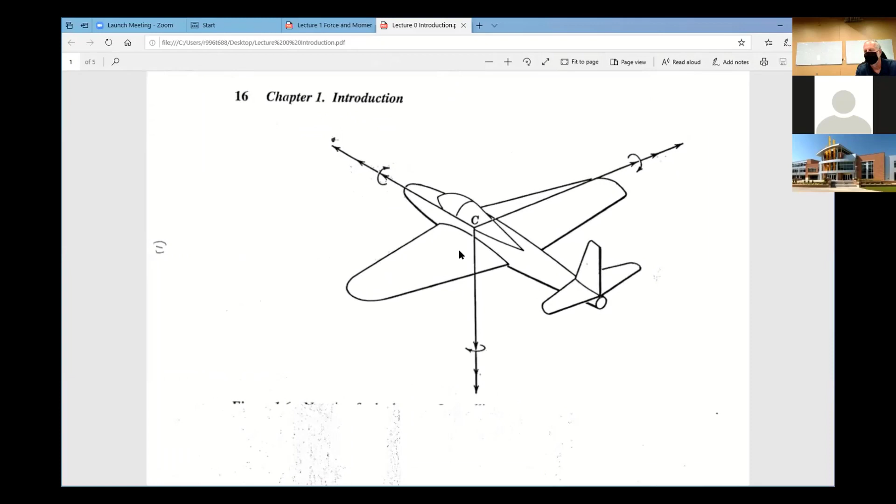So I want you on your piece of paper, on your notes, to draw this. You don't have to get the airplane looking that good, but draw that. Then on the diagram where you see the arrows, put the labels for the forces and the moments here and here. And the arrows there, label the axes first, X, Y, Z.

And then label the forward force X. I'm forgetting one thing, let me look at my notes. Yeah, so label the axes X, Y, Z all the way on the end of the axis. And then label the linear velocities U, V, and W.

I'll show you the answers here in a minute. Then label the angular velocities P, Q, and R on those circles. And then also label roll, pitch, and yawing moments on those.

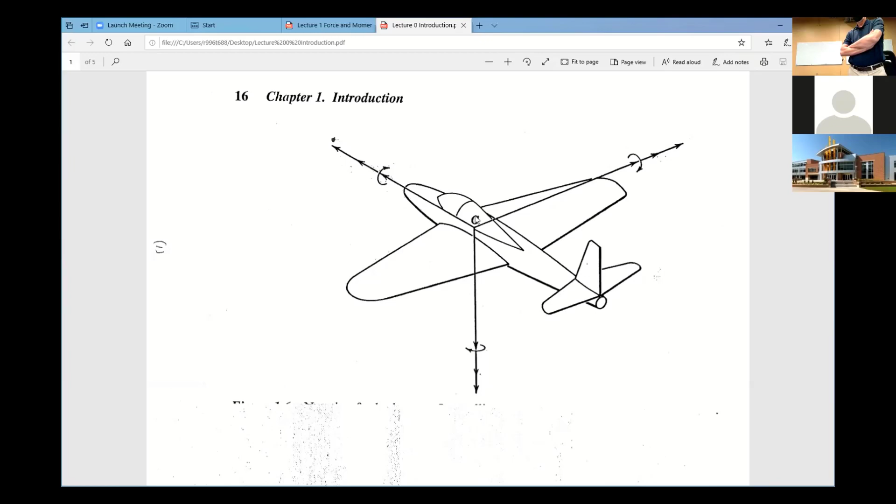All right, so here's what you should have. Now there's extra information, the X, Y, and Z are the forces, but I didn't have you put those on there. Is everybody at a place where they can see this, one of the other screens pretty well? Is it clear enough?

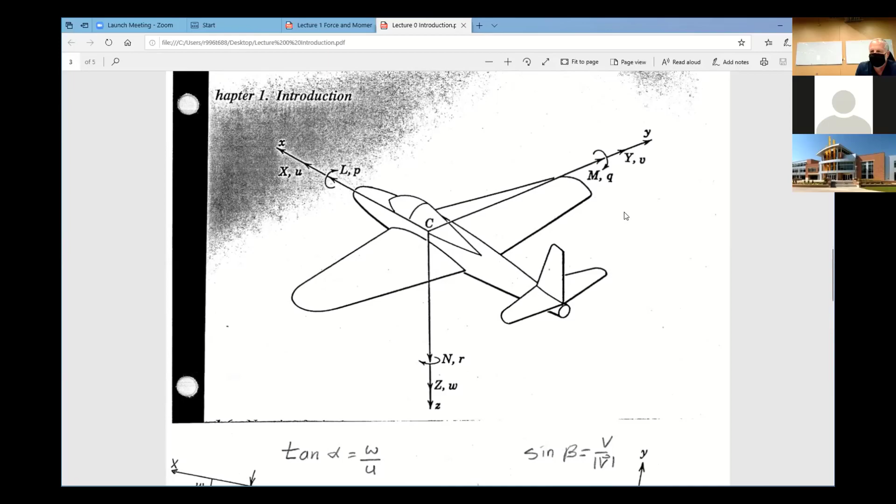All right, so this is what we've been talking about here. We have linear velocities. The velocity vector is U, I, V, J, W, K. That's forward, side, and vertical velocity. By the way, since I've already written this down, usually I write this on the board, so it takes longer. So if I get ahead, raise your hand and say slow down. Either that or we'll be done with the class halfway through the semester and we won't know what to do.

And then the angular velocity vector omega is P, I, Q, J, R, K. That's essentially what we drew on the diagram. And then the forces X, Y, and Z are sometimes called Fx, Fy, and Fz. And then we have the rolling, pitching, and yawing moments, L, M, and N.

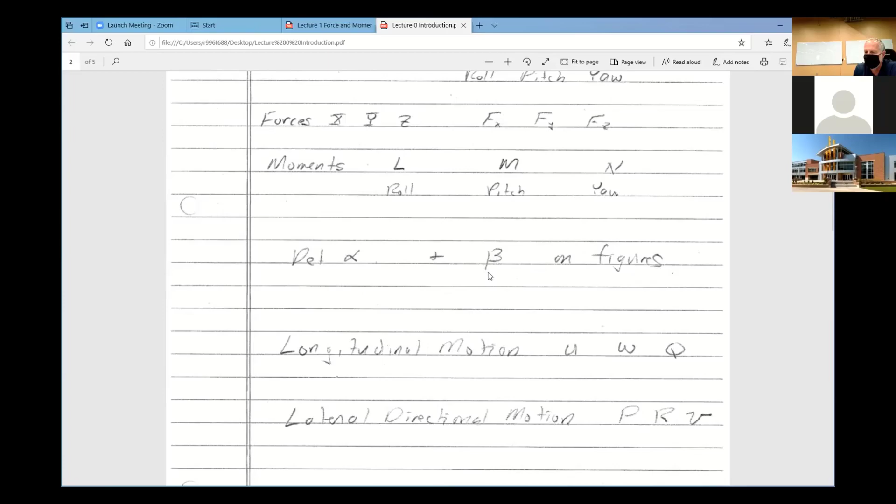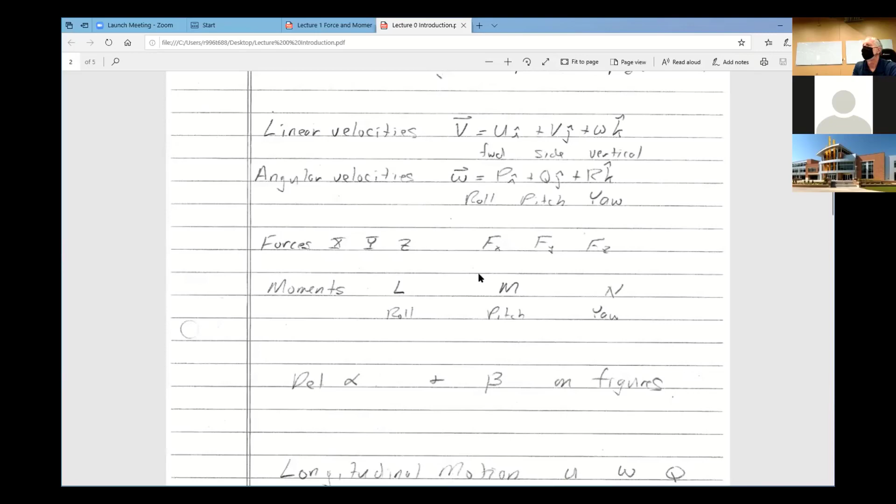And then we have the usual definitions of angle of attack and side slip angle, beta. Yeah, what do you need? I could potentially zoom in a little bigger, but I'd want to make sure that we get a significant part on the screen.

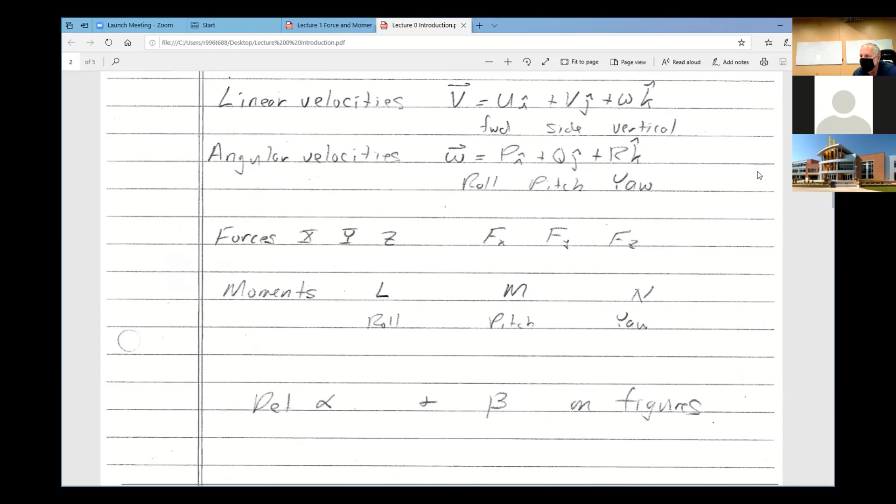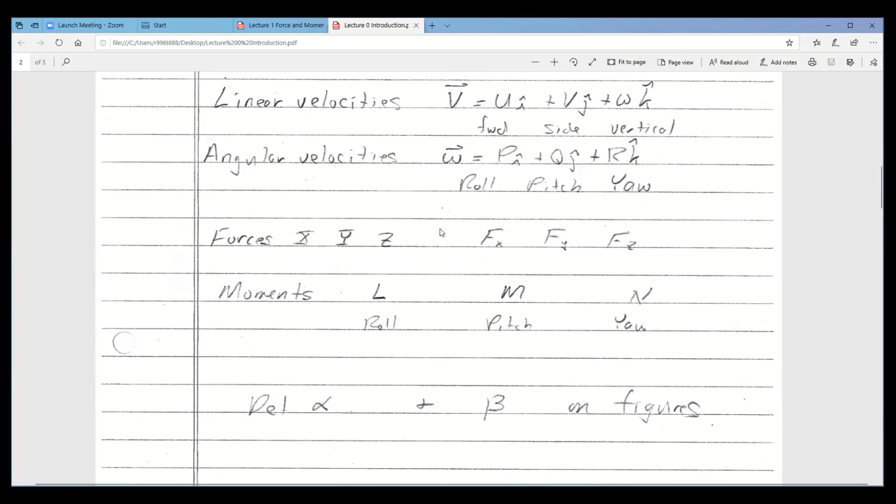We don't need... are we good? So we're going to define alpha and beta, and that's on the next page. So if you look at the top, start with the right figure here. That's where we need to start. There's the full velocity vector.

Forward with some side velocity v. And then you see the other two components, the x and the z component, both in this plane here. Hang on a second, let me see if I can make my cursor bigger. All right, let's see how we're doing now. I think that's easier to see.

So we've got the velocity vector here, the side velocity v, so this angle is beta. And so the sine of beta is little v over the magnitude of the full vector V, right?

And then if you look at the side of the airplane, you can see the two components that were hidden in that vertical plane, the u, forward velocity, and the downward velocity w. And so alpha is the tangent of those two.

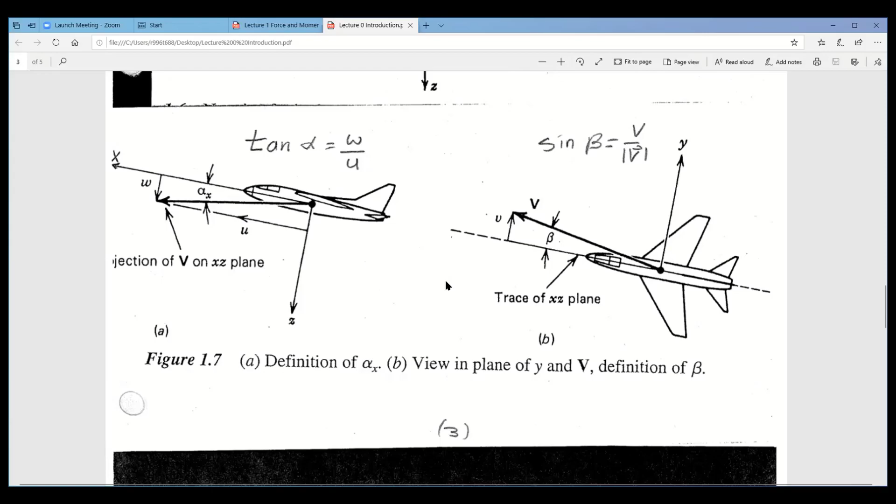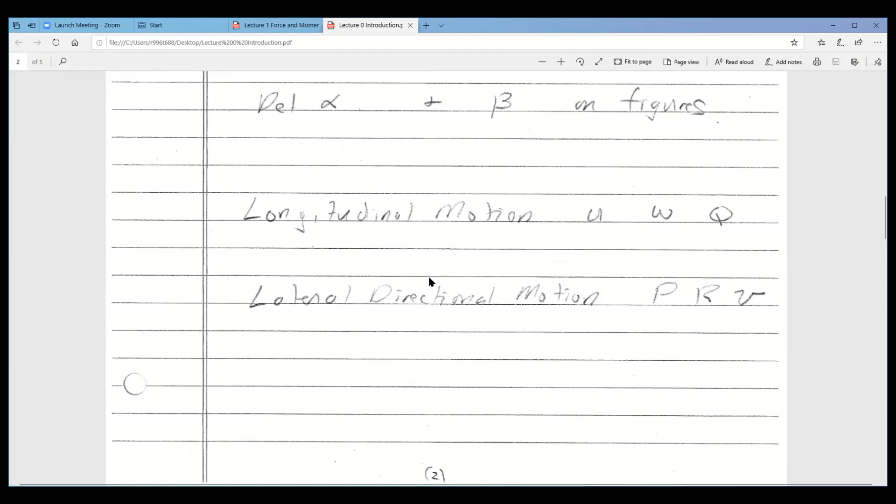All right, the last thing that we'll use, and that is really washed out. Can you see that? It's what we call longitudinal motion and lateral directional motion. Longitudinal is U and W and Q. And lateral directional motion is P, R, and V. So really this is motion in the vertical plane and pitch. And then lateral directional is anything outside that vertical plane. So roll, yaw, pushes the nose outside of the plane, or the wings outside the plane motion. And then side velocity is out of the plane because you're moving the airplane across the plane.

And you've seen this before in your undergrad classes, just a reminder, because we can separate out the analysis into longitudinal and lateral directional, and it makes things a lot easier.

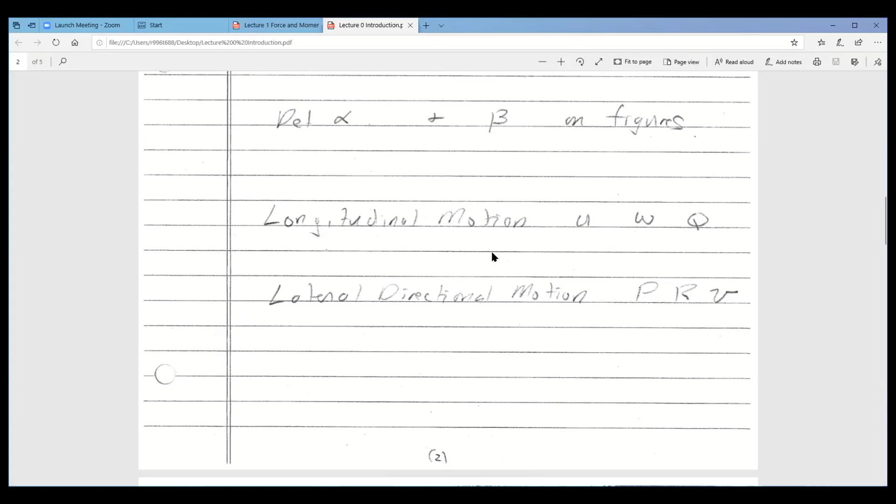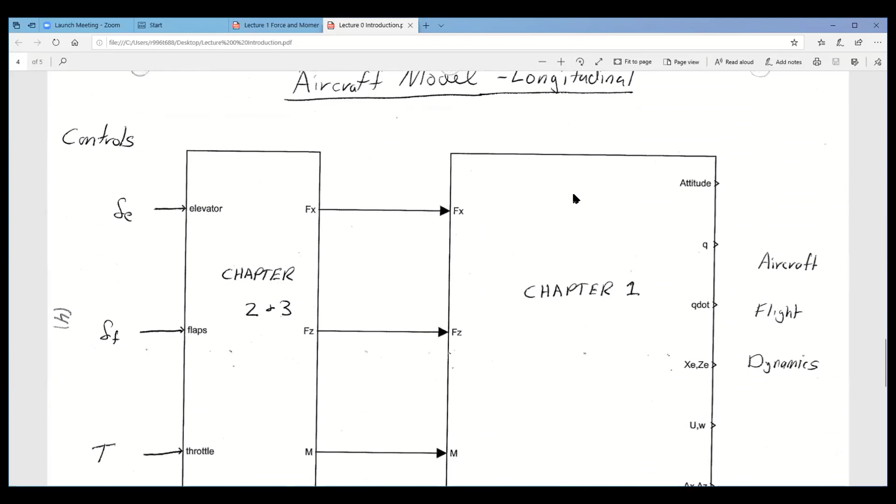All right, so we've done all this. This is a diagram that kind of outlines the first half of the class. Chapter 1 is going to be the equations of motion, where you put in the forces and moments, and then you calculate the motion. Attitude, pitch rate, this is longitudinal, the velocities here, and accelerations. So chapter 1, we'll be talking about essentially Newton's laws for the airplane. So we'll spend 2 weeks, 2.5 weeks on that.

And then chapters 2 and 3 are talking about how do you calculate the forces and the moments. Because the elevator produces a force, it also produces a moment. Flaps, throttle, produce forces and moments. So essentially we're going to calculate lift and drag and pitching moment and then put them in the proper axes.

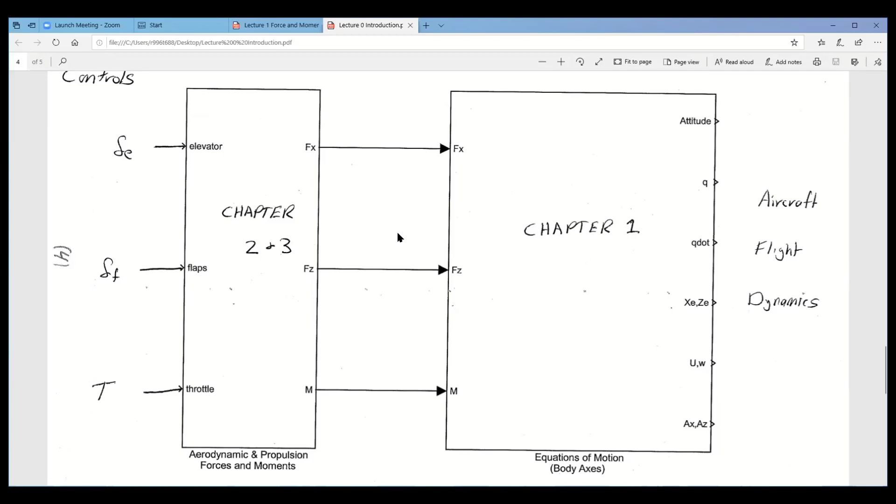And then we'll also talk about the full equations of motion occasionally, where you have elevator, flap, thrust, aileron, rudder, spoilers, and you get the 3 forces, the 3 moments, and it goes into the full-blown equations of motion that are not separated out into longitudinal and lateral directional, and you calculate the motion of the aircraft. You don't need to copy this down. It's just information about, well, I'll show you some block diagrams as we go along in MATLAB that do this kind of thing.

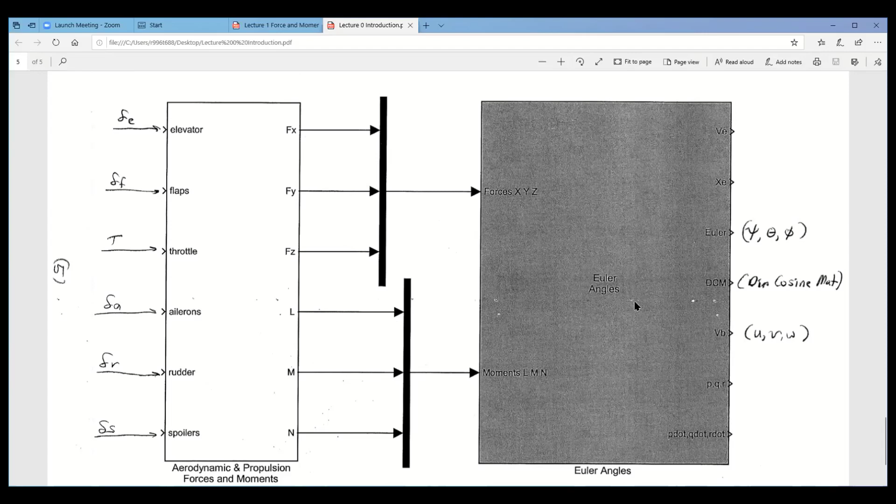All right, questions so far? This is kind of an introduction and a reminder of stuff we knew in 514.

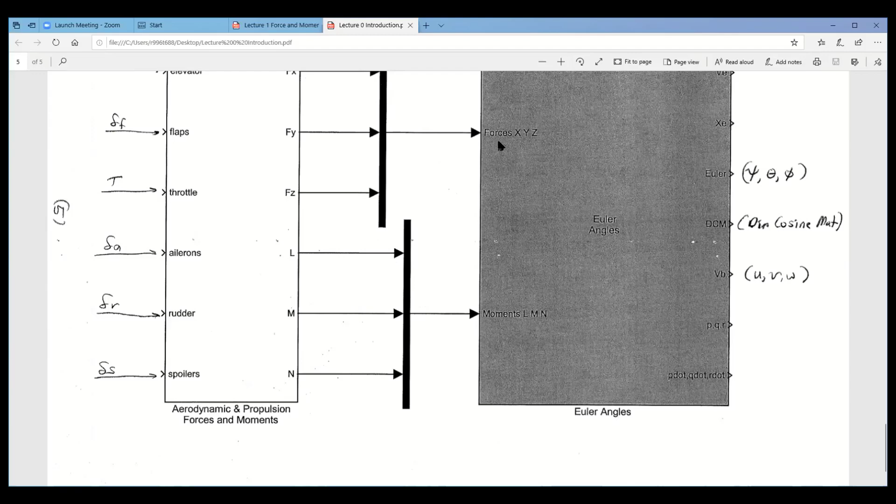And I'd say that chapter 1 and the lecture we're going to do next time is probably the most tedious that we'll do here. In your dynamics class, you looked at the equations of motion for a distributed body, right? Newton's law is for a point mass. But if we have a disk, then we need to apply Newton's law to all of the little tiny point masses on that disk.

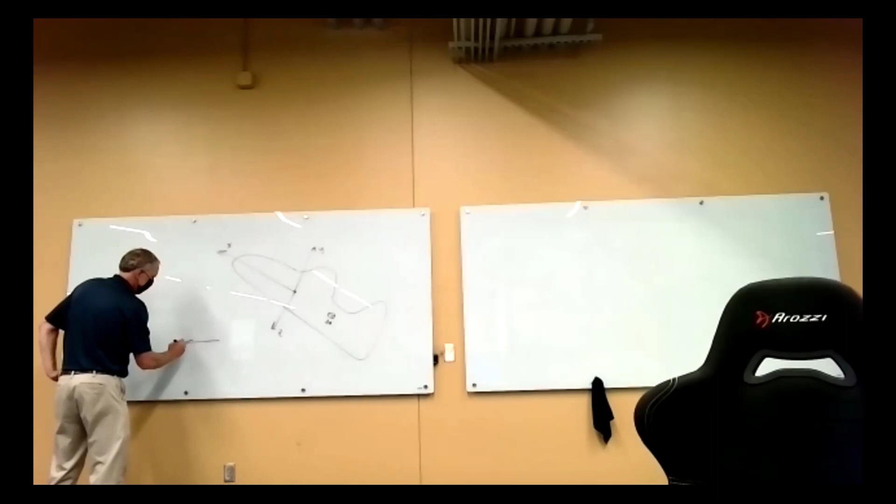On any kind of a rigid body, we can attach a body fixed axis system like that. But it's not a point mass. And so we have to look at the forces and moments on each little point mass dm. And we have to do that relative to another axis system that's inertial, because this body can be rotating.

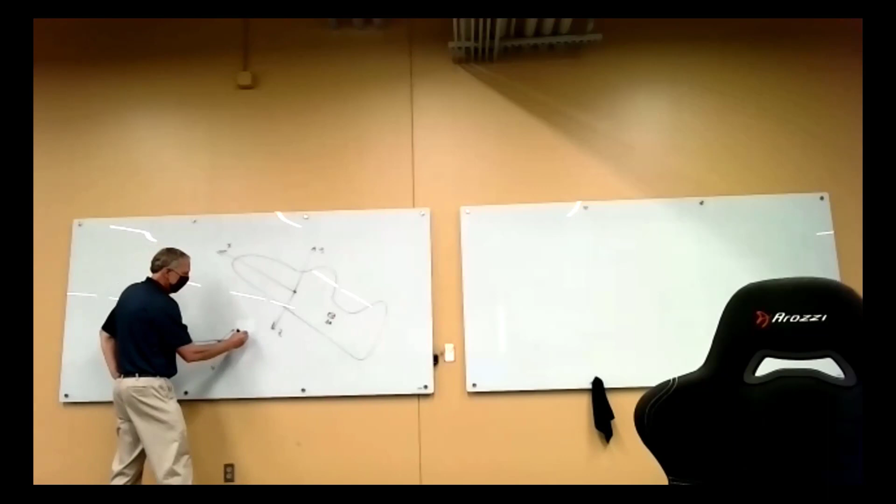And so the diagram that I'll pull up here in a minute, but I wanted to walk through it before we looked at the whole thing, is that we have to look at how each little point mass via a position vector moves in this axis system, the inertial reference frame. And so essentially we end up integrating all of these little masses and Newton's law applied to each of those masses over the whole airplane.

The picture I'm going to show you is my sketch. It's not the greatest, so there's a version of that in your book you can look up as well. It's much better because they took a lot of time drawing it.

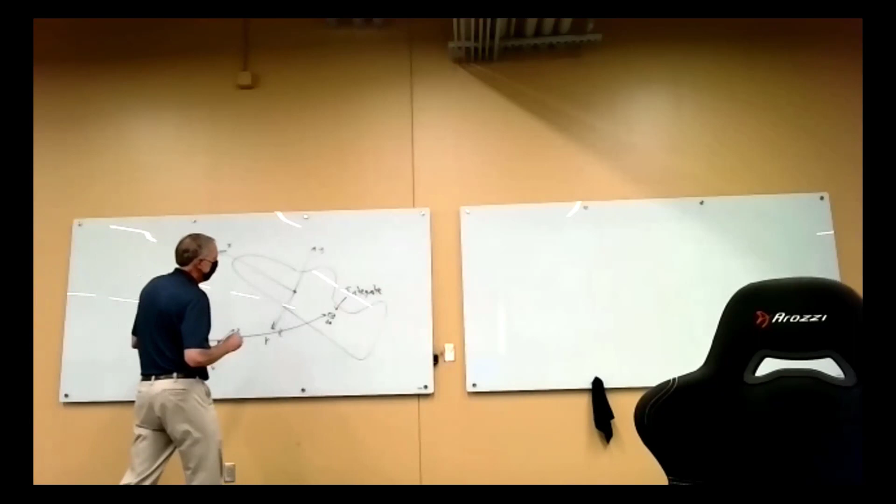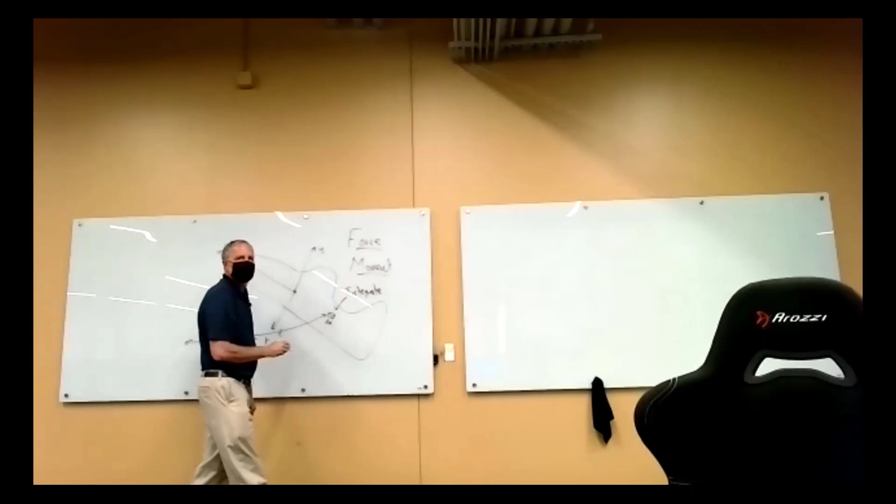But what we're going to do is write the force equation for Newton's law and then also the moment equation. This one's not too bad, but this one gets complicated.

You've essentially gone through some form of this in AE 223. No, what's dynamics? Gosh, I've lost it. You guys should know. Dynamics, okay, we'll call it that. 223, I think, is statics, right?

Anyway, in dynamics you did this probably for a disk, and you end up with the moments of inertia of the disk, like IXX, IYY, IZZ. So we're going to go back to square one and go through the whole thing again, just for completeness and so you understand, you've seen it again. It may come in handy.

I had a grad student who wanted to do something with an airplane where the wing fell off. Obviously if the wing falls off, the inertias all change, and he wanted to simulate that within the equations of motion. So he went back and derived the equations again for a mass moving or shifting.

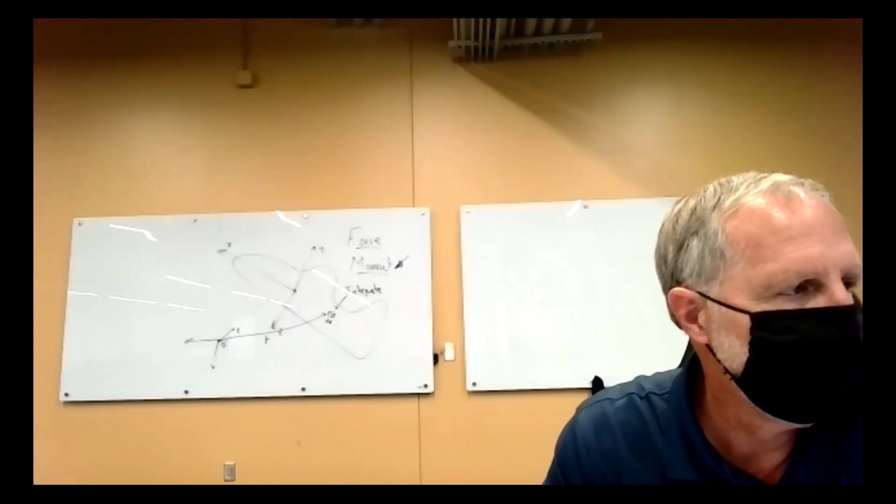All right, so I'm going to go back to this. Let me share my screen.

We look at each little mass element, and there's a vector R prime that points to it from O. We also track a vector RP that goes from the origin to some arbitrary point P on the airplane, and then we track the mass relative to P with this vector R. It's going to turn out that this point P will become very important if we choose it properly—it'll simplify things a lot.

So the idea here is that the forces act on the area here, so that's like pressure—force per unit area acts on this little element ds. It has a volume dv, so if you multiply by the density, you get the mass.

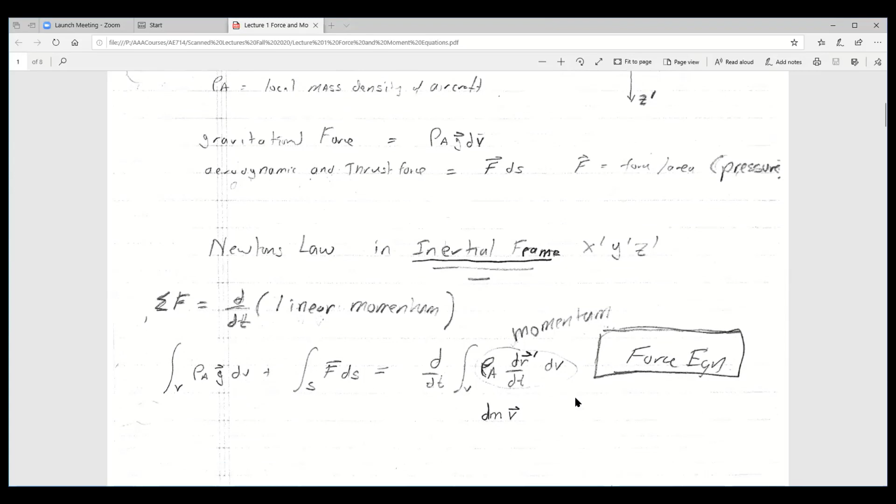The next equation is just going to be r cross that inside each of the integrals. This is sum of the moments is d by dt of the angular momentum, or it's really just r prime, the vector from O to the dm, crossed with each of the forces and the moment. So angular momentum is r cross linear momentum. Angular moments are r cross forces, gravity, and so on. I'll give you a minute to write that down.

You'd think we'd be done, and we are, except that it's very difficult to handle all of the terms in this equation relative to this inertial coordinate frame. It'd be nice if instead of doing these integrals in that external Earth-fixed frame, we could do it onboard the airplane. Because no matter what the orientation of the airplane is, whether it's pitching up or pitching down, all of the mass elements are in the same spot in that body-fixed axis system. But in this Earth-fixed axis system, if the airplane's climbing, the nose is up. If the airplane's diving, the nose is down. So you have to keep track of that inside these equations of motion all the time. So for good reason, you convert it to a body-fixed axis system, XYZ. That's what we're going to do for the rest of today and next time.

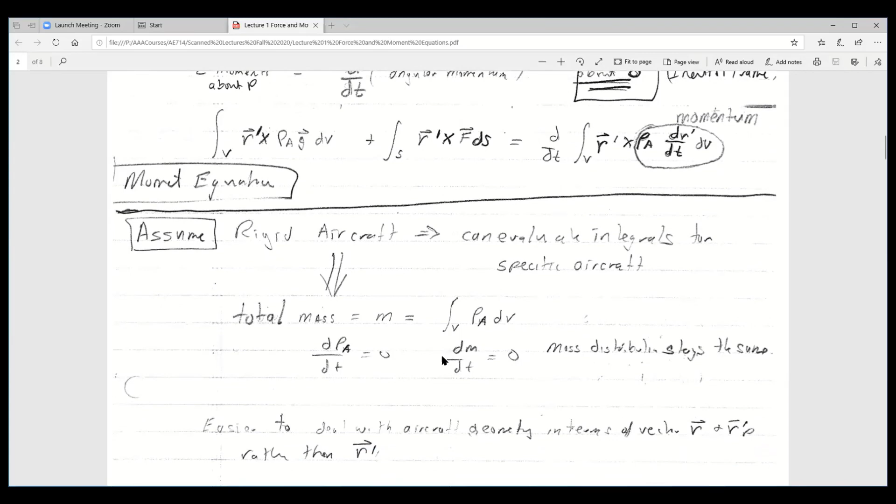So the next step is what I was talking about. It's easier to deal with the aircraft geometry in terms of the vectors r and rp prime. So rp prime is the vector from the origin to that point P on the airplane, and then r is the little vector on the airplane.

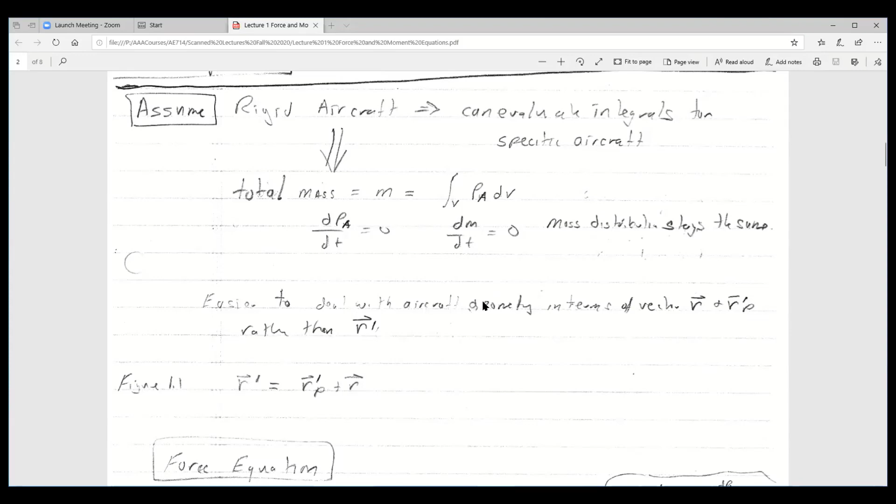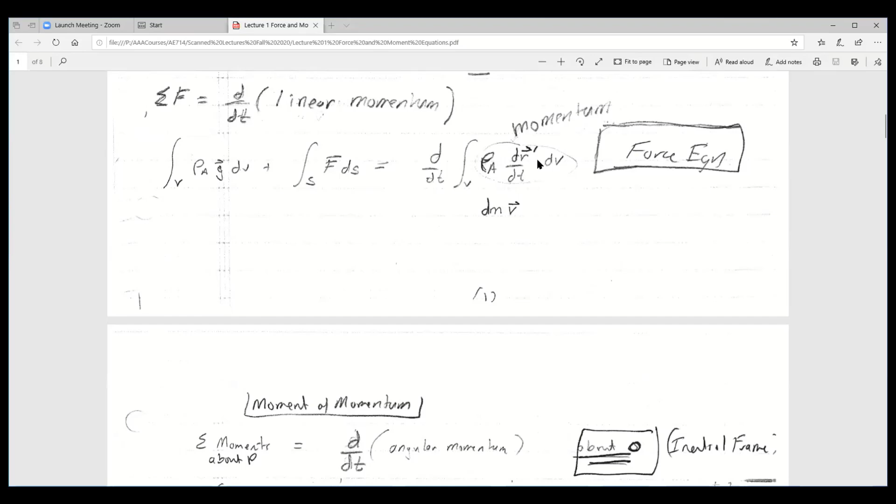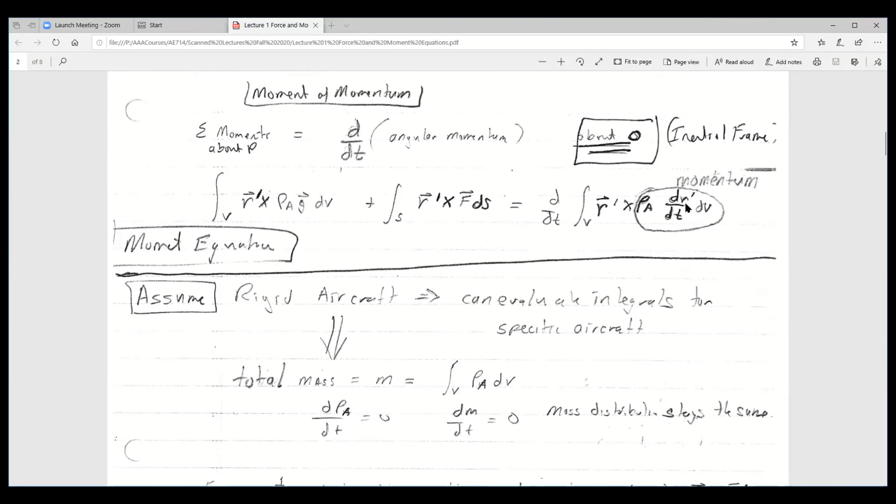What we're going to do is everywhere we see r prime in the equation on this page — the one I had you write down — oh sorry, not the moment equation, we're doing the force equation. Everywhere you see r prime, we're going to put rp plus little r. And that's why the force equation is so easy, because r prime only shows up in one spot. You can imagine the moment equation is going to be a little harder because here's r, here's r, here's r, and here's r. But we're not going to do that one today.

So we plug in rp plus r, and then we separate out these two integral terms. I'll give you a minute to write this down.

So really all you're doing is making the substitution and then splitting that integral into the sum of two integrals. And we can pull rp out because rp doesn't depend upon dv. rp is that point P is fixed on the airplane.

It does not depend upon which little mass element we're looking at. And then we're going to look at this and say, well, gee, that's just the total mass. Because we said we have a rigid airplane, we can pre-calculate this. So why leave the integral there? We're just going to call it m. So this is mass times gravity. Makes sense. That's a force on the airplane.

And then we're going to say, well, we can calculate the total lift of the airplane by integrating over all of the surface area of the wing and the fuselage and calculate an aerodynamic force. So we're not going to leave this integral in there. We're going to say, well, the aerodynamicists are going to tell us what the aerodynamic forces are. And then the propulsion people are going to tell us what the thrust forces are from the engine.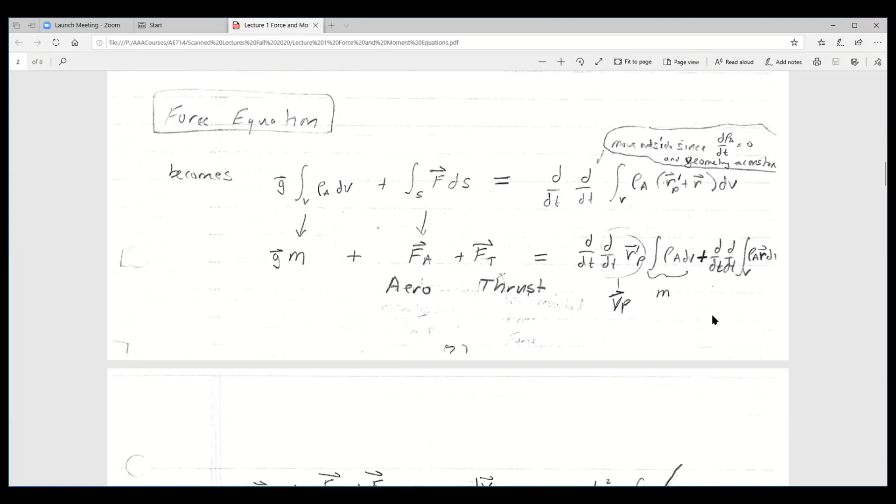And so what about this term here? That looks really complicated. So I need to go to the next page. So d by dt of r, that's just the change with respect to time of that position vector, so that's just vp. And then d by dt of velocity is acceleration, so we're good there.

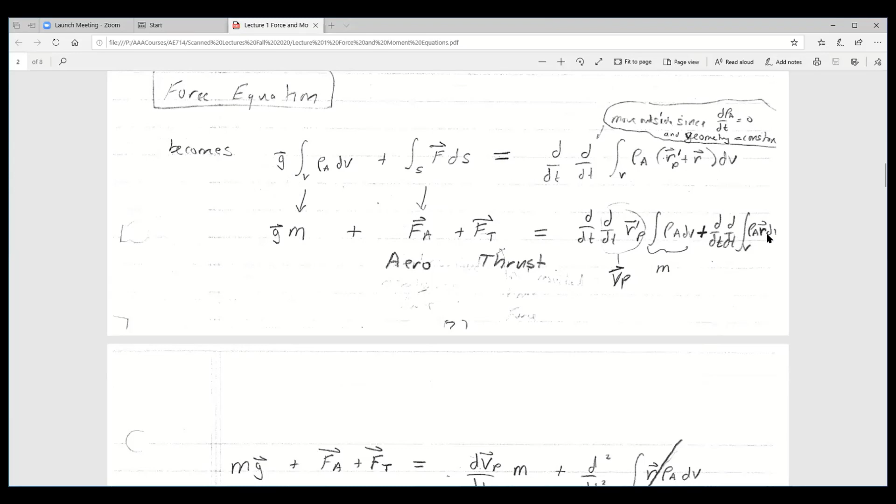And then this term here, this says the integral of the mass. Let's go to the next page. Are we good? Anybody still working on those others? And again, I encourage you to write this stuff down like you normally would if I'm writing on the blackboard, because it keeps you engaged.

All right, so what we need to think about now is, well, what is this term? This is the density times each little dV. So let's look at a real simple case. Let's not look at an airplane. Let's look at this picture right here. There's the point P. And what if we have a kilogram mass over here, like on a barbell, and another kilogram mass over here? And they're each 1 meter away from the center point P.

And then we do this integral. This says, well, we have to add up this positive distance 1 meter over here times 1 kilogram. And then we have to add up this negative distance over here times 1 kilogram. And what do I get? Positive 1 plus negative 1 gives me what? 0 if the point P is in the middle of these two masses.

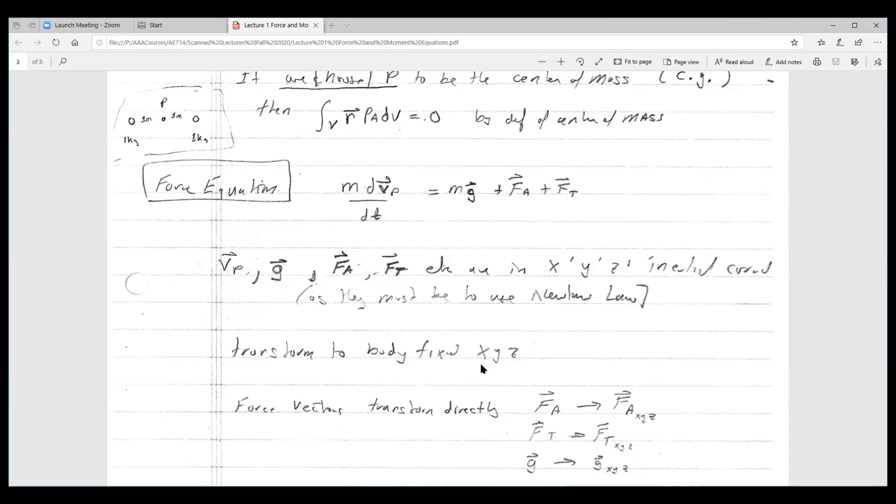All right, so really all we do is take the vectors of forces and transform them. We put an XYZ on the bottom so that we say now we're in the XYZ axis. And by the way, we're going to drop writing the XYZ from now on and just assume that we're always in the body fixed axis system, because we're going to be calling it the body fixed axis equations of motion.

The only tricky part is that if you have an axis system XYZ that's rotating, then the derivatives have to be adjusted. So here's the derivative of a vector A in the inertial reference frame, and here's what you have to do if the body is rotating with an angular velocity omega.

This is where you start talking about centripetal acceleration and all of that stuff. This is the derivative term, this is a centripetal term. And so to take the derivative that we have in our equation, the dv by dt, we have to do dv by dt plus omega cross v in order to get that.

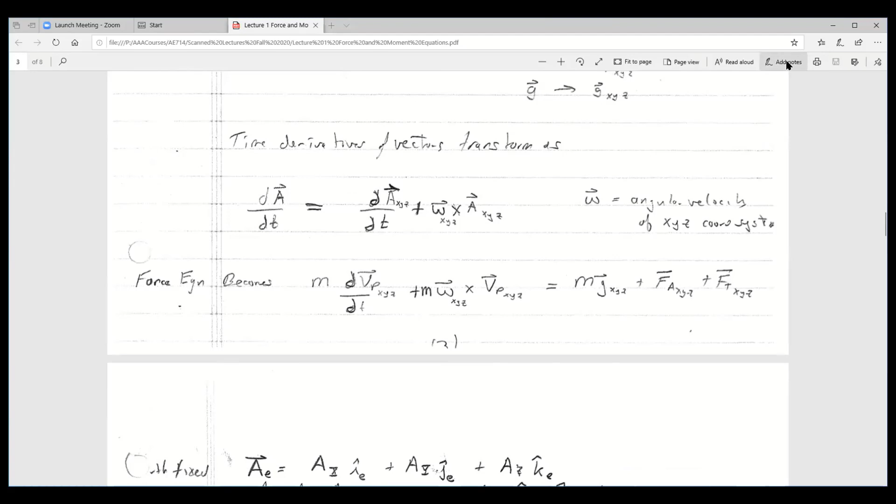So once we realize we have to do this, then here is the force equations of motion right here. And it's important that we highlight this, because this is what we'll use for the dynamics of the airplane.

So the last piece that we need to do on this equation before we quit is we have to take this cross product here, because everything else is just stuffing in vectors. So we'll have to calculate that cross product.

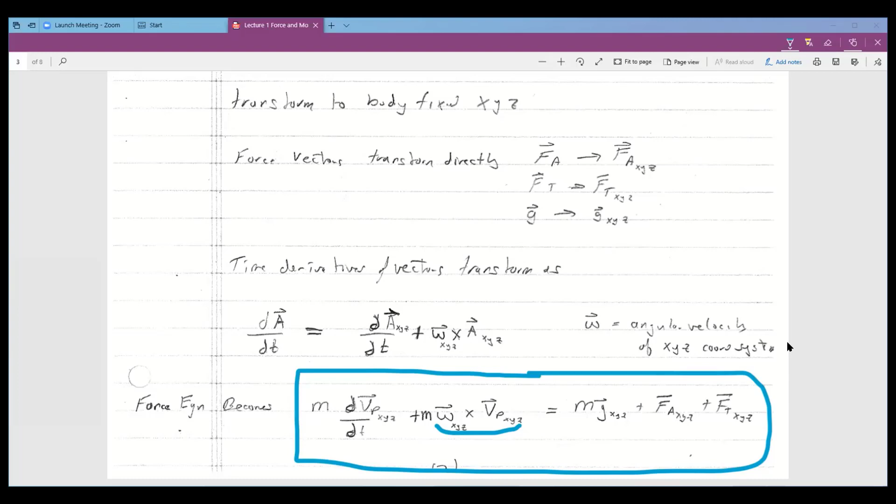All right, again, please say 'can I see the previous page again' if you need to. So this is not a derivation, but I want to convince you that this thing here is true.

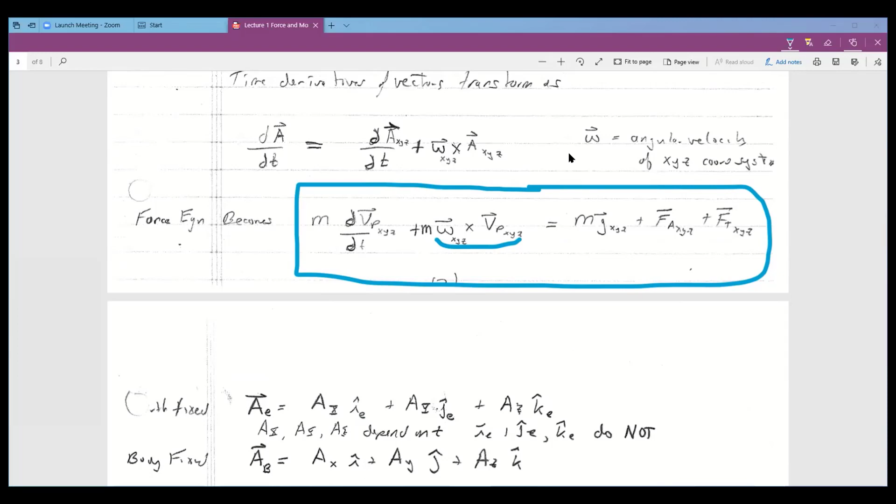So does it help if I actually turn on this pointer and write on the screen as I talk, or does that get in the way? I did that when I was doing online lectures recording because it kind of pointed to stuff, but I don't want to clutter it up.

So the deal is in the Earth fixed axis system, this is a vector AX, AY, and AZ. Those three things depend on time, but the unit vectors I, J, and K do not depend on time. Whereas if we have that same vector expressed in the body fixed axis system that's moving, then AX, AY, and AZ do depend on time, and I, J, and K, because they're the unit vectors in the axis, they're moving as well, and so that's where those extra terms come from.

So if you look at taking the derivative of this thing down here, you have to do the product rule. You have the derivative of AX with respect to time times I, and then AX times the derivative of I with respect to T. Same thing for J and K. And so these extra terms are what give you that cross product, the omega cross the vector.

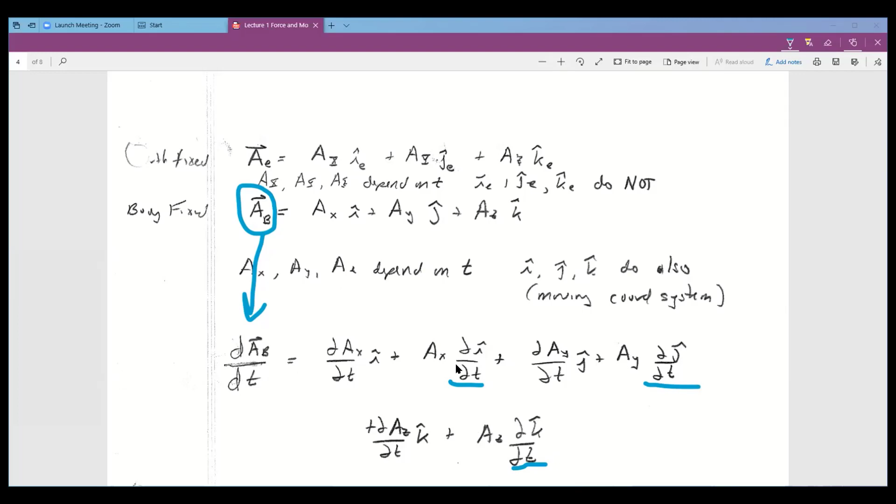And so that's really all I want to do with the derivation. If you collect those terms together, that's what this is saying, is that's omega cross A. And if you go through a derivation, you can see that, for example, the vector I here is changing due to Q and R, right?

Q is making I go up, and R is making I go over. And P doesn't change I. And so that's why you get the cross product, is that Q and R are the J and K, so those cross products show up, and those change I, and in fact, that's what those terms are in the omega cross the vector. So again, I'm not trying to derive that, I'm just trying to say that these terms, if you go through a full derivation, you get that omega cross, because this vector I is changing due to Q and R.

All right, so did I go too fast through that? Okay.

This is what you need to write down. So an Earth fixed vector does not, the unit vectors don't change. In the body fixed axis, they do change. And really, this is just not a derivation, it's to convince you that it makes sense.

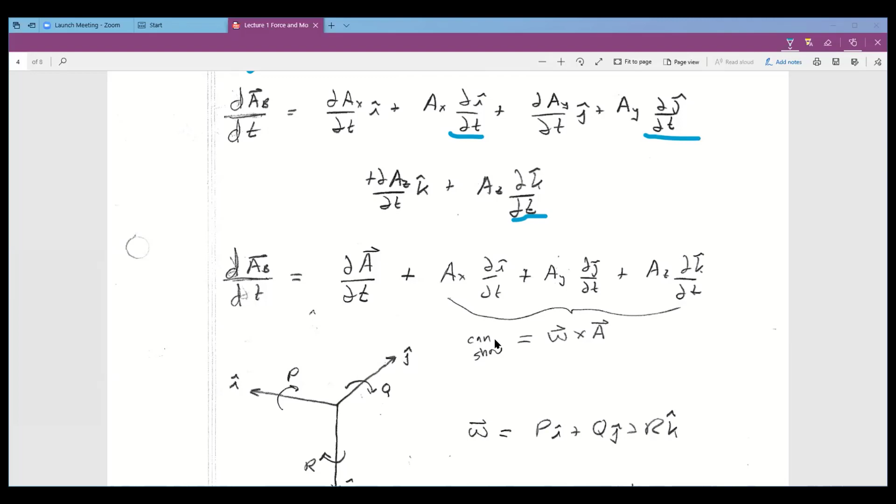All right, so this down here, I don't want you to write. That's just reminding me on how to talk through I changing due to Q and R. If you want to write this part down, you can. But really, that's all it is, you can look at this diagram and say Q and R obviously change I.

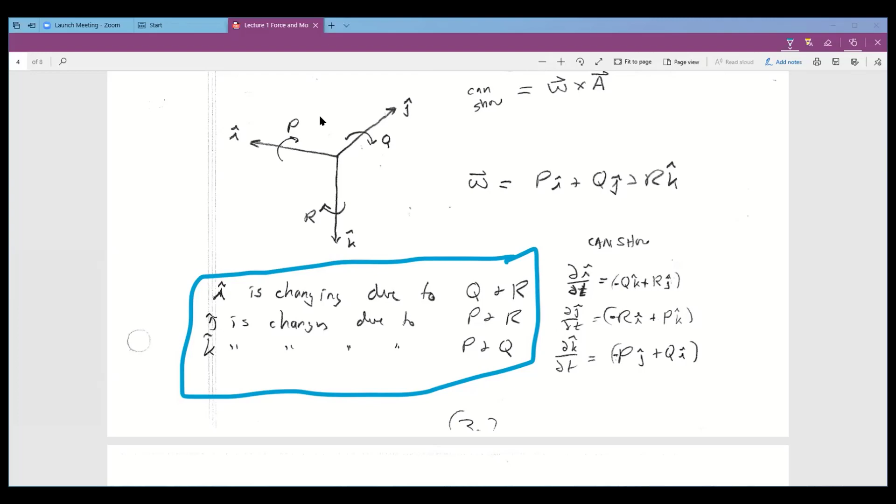So what we're going to do—and I guess we're going to go a few minutes over—what we need to do next is plug in the vectors here. And in fact, let's quit. This is not that big of a step, but let's save it for next time.

And then we'll go on to the moment equation. If you want to do this, because I'm going to give it to you to do next time, carry out this cross product—that's omega cross velocity, omega cross with VP. So when you go home and you're looking through your notes, carry out that cross product, because everything else is easy—it's just derivatives and plugging in the vectors. That cross product's the only thing we have to work on. But I want to give you time to write it down and we'll do that fresh next time.

So if you're reading the book, start reading chapter 1. It goes through this, and you can read ahead about the moment equation as well.